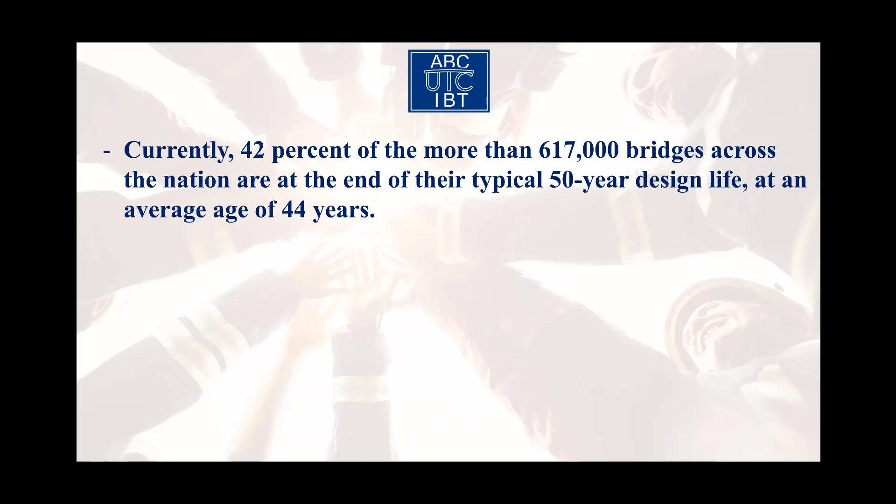It doesn't happen just by advertisement, by marketing, things like that. It doesn't happen that way. It happens by technology. So that's why this time our task is to bring all types of advanced technologies into bridge engineering in the US and communicate that with our stakeholders, with the bridge owners, state DOTs, municipalities, and so on.

That's why the type of research we're going to do is so interesting. We're going to be multidisciplinary. We are going to have our faculty who work with us closely tell you about their areas of research. And then at the end, I will come back and show you a couple of areas that I work on myself. But before doing that, I want to show you a video clip.

I want to show you this hopefully will tell you how influential we are with bridge owners across the US. To do that, if you allow me, I'm going to show you a very short videotape, a video recording from one of our conferences that happened in 2019, that really shows you our connections, how we connect with the industry, and what kind of influence we have.

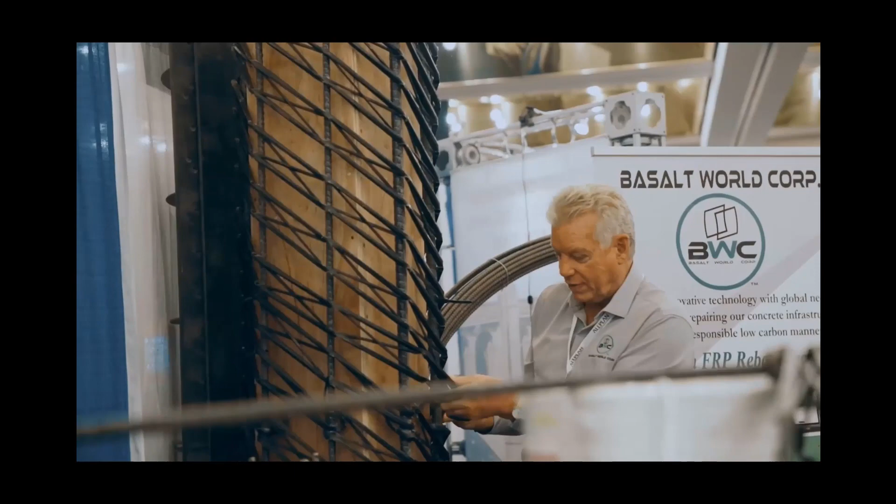We have exhibitors with the latest in innovations, materials, and technologies to support the ABC implementation effort. We have all the experts, those who are making things happen in ABC around the country here. You can talk with them on a one-to-one basis. It's a great opportunity for anyone in the bridge community to participate.

This year's conference is great. There's more attendees than before. It's been very good. We had a lot of traffic at our booth, so we're happy with that, and definitely met a lot of quality people.

This is a great conference. Not only are we talking about theoretical use of accelerated bridge, it's actually a lot of practical solutions. Whether you are integrated with your ABC and just how you do business, whether you're just starting out, whether you want to advance what you're doing, this conference offers opportunities in a variety of areas.

Great networking. The content of the presentations has been fantastic. And really, I've gotten a whole lot out of the exhibit hall as well, interacting with the exhibitors. So I definitely recommend attending the conference.

The award program provides an opportunity to showcase innovative projects and to recognize talented individuals that advance ABC. I think it's important to acknowledge what the industry is doing, and I think we need to continue to highlight people and projects just for the sake of ABC becoming common practice.

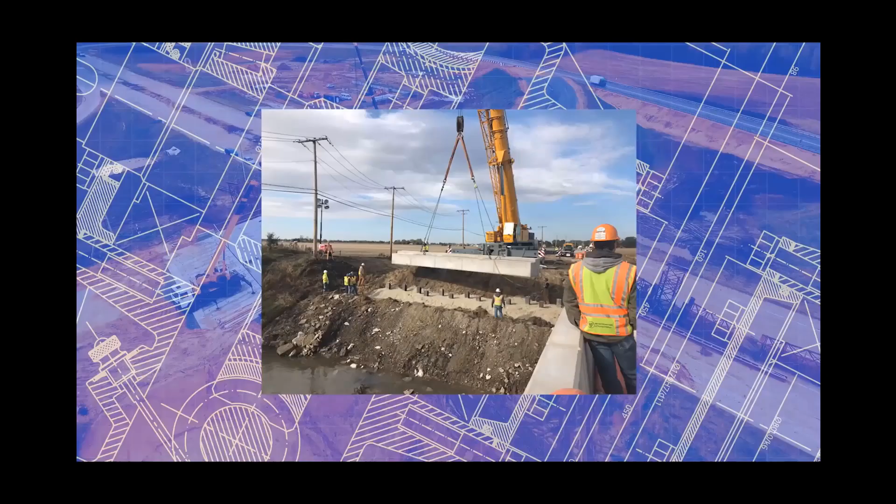We need to get it involved in every project. It's the right thing to do. It minimizes impacts to the public. It improves safety. It improves quality, and it makes me really proud to get this award because I know I was doing the right thing.

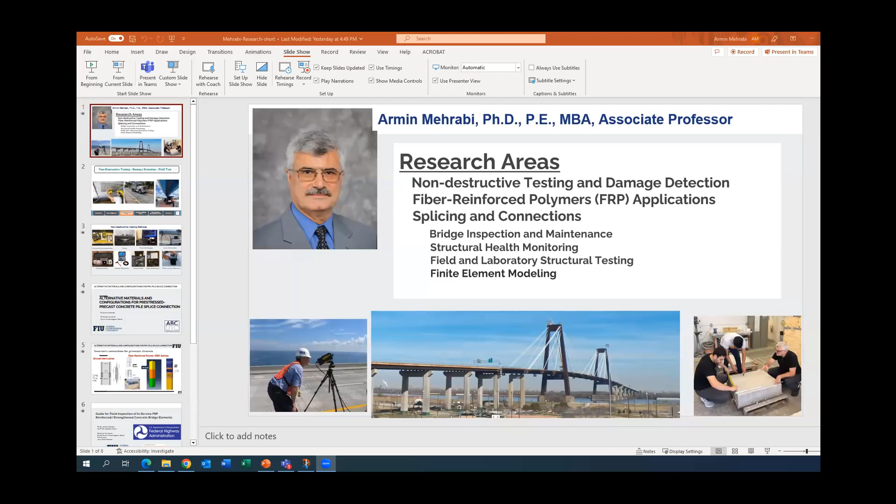Thank you very much, Dr. Azizinamini. So again, my name is Armin Mehrabi. I work at the UTC Center, and an extra point is that currently I'm also graduate program director. So for those of you who like to join our graduate program, I will be your first contact.

And I will help you through going to graduate program. And if you are interested in any of the fields and topics that you see today, so we'll make it happen that you get internship or other positions with the center.

So the areas that I work currently, and I have been working for the last 30-some years: non-destructive testing and damage detection, one major area. Then from the new, let's say, relatively new materials in construction and bridge construction, especially the fiber reinforced polymers, composite.

I currently have several projects in methods of splicing and connection in structures. And sub to that, the minor areas: bridge inspection and maintenance, basically structural health monitoring, field and laboratory structure testing, and advanced analytical models like finite element modeling, etc.

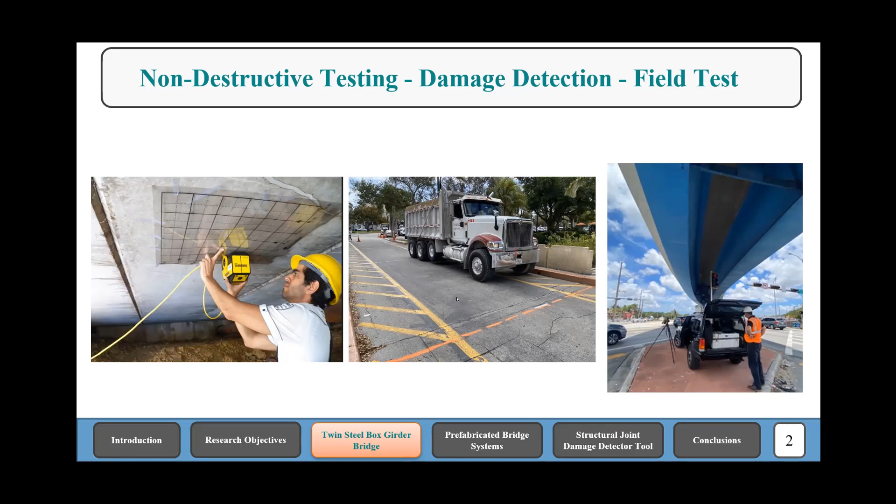Again, my team, which is part of ABC UTC or IBT ABC UTC, possesses - that's the important thing - most of the major non-destructive testing methods available and devices, including GPRs, drones, lasers, thermal imaging, etc.

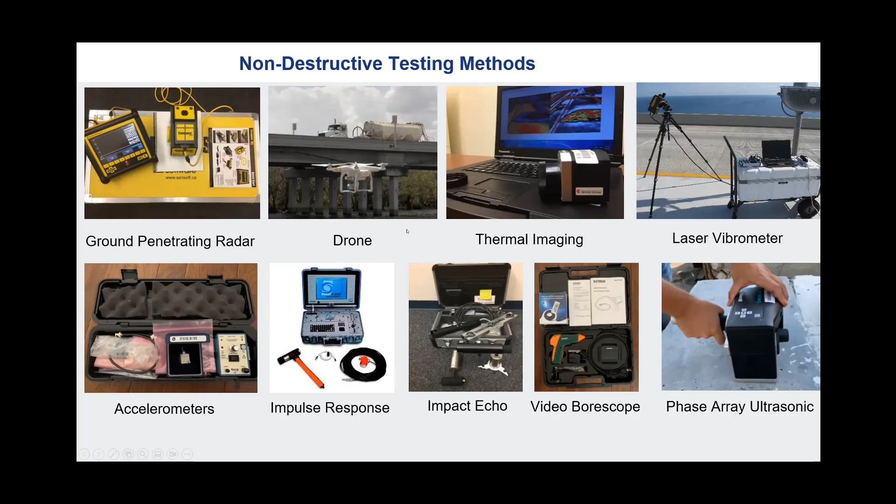Just a couple of projects I've worked on as examples of what we've been doing. One is very dear to me and my team - a project we did for the ABC UTC, looking for alternative materials and configurations for pre-stressed precast concrete pile splicing connections. Basically, to connect and splice the piles that come to the field for driving into the soil. This project gave us a lot of products, including methods and means applicable not only to piles but to all structural prismatic elements as well. This is a sample of how ABC UTC can help any topic reach its maximum potential.

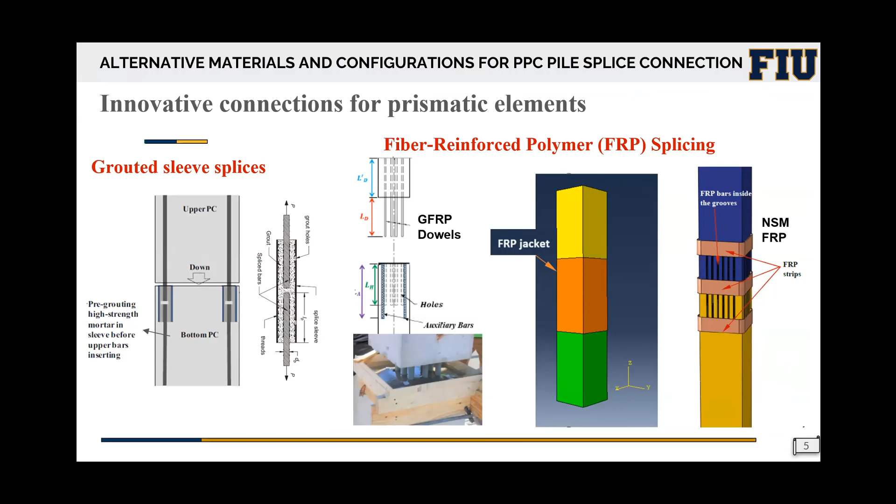As part of that project, we proposed three different new connection methods: grouted sleeve splice for prismatic elements, and splices using fiber reinforced polymers, FRP. We received three patents on this product. During the life of the project - a year and a half, two years - we received three patents.

Another project I'm doing for the Federal Highway Administration is developing a guide for field inspection of in-service FRP, fiber reinforced polymer, reinforced and strengthened concrete bridge elements. Interestingly, despite so much work done on inspection and NDT testing, there is no guide for field inspection of concrete elements that use FRP. So our team took on developing this guide.

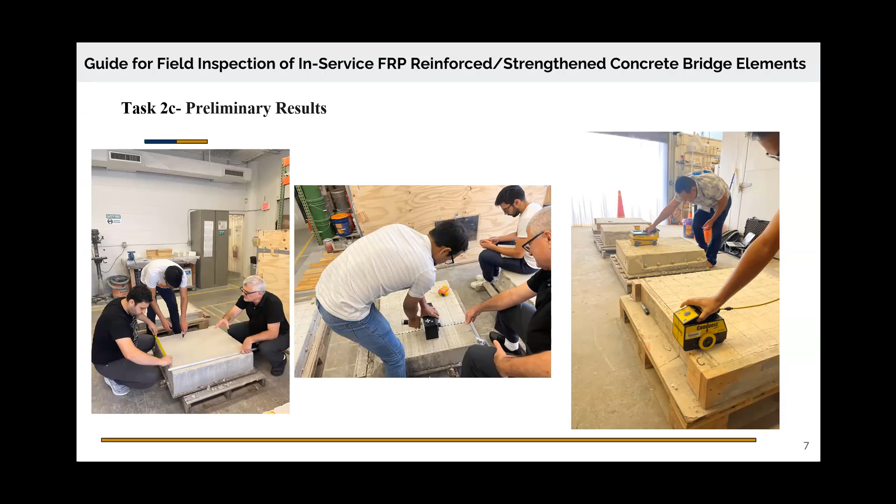That project, in addition to analytical work and review of other work, also involved constructing several specimens, as you can see. I want to include this picture because our work includes lab testing, field testing, analytical work, etc., to give you a picture of what's really going on in these projects. These pictures represent the top of the work.

On the left side, you see glass fiber reinforced polymer that was placed in the concrete, then the concrete was cast on it and embedded. Below, you can see GPR detecting the glass fiber reinforced polymer inside the concrete. The significance is that not only have we detected steel in concrete before, but this is the first time detecting plastic, non-metallic elements. On the right side, you see external application of FRP - on top, application of carbon fiber sheet for strengthening, and below that, a thermal image of that surface showing exactly where the damages are.

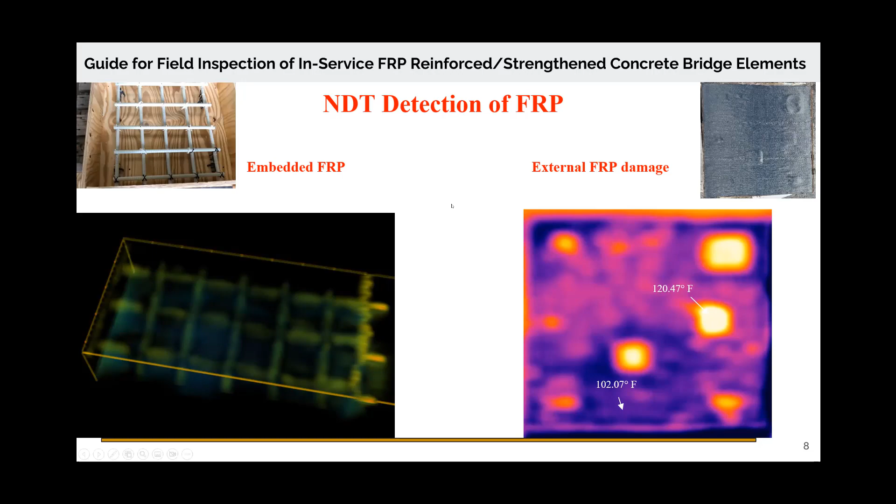These are just a few examples to give you an idea of what's going on with our center, specifically in my group. As Dr. Azizinamini mentioned, anybody interested in any of these topics or others, please get in touch with me and other faculty. We will be more than happy to help you through the decision making.

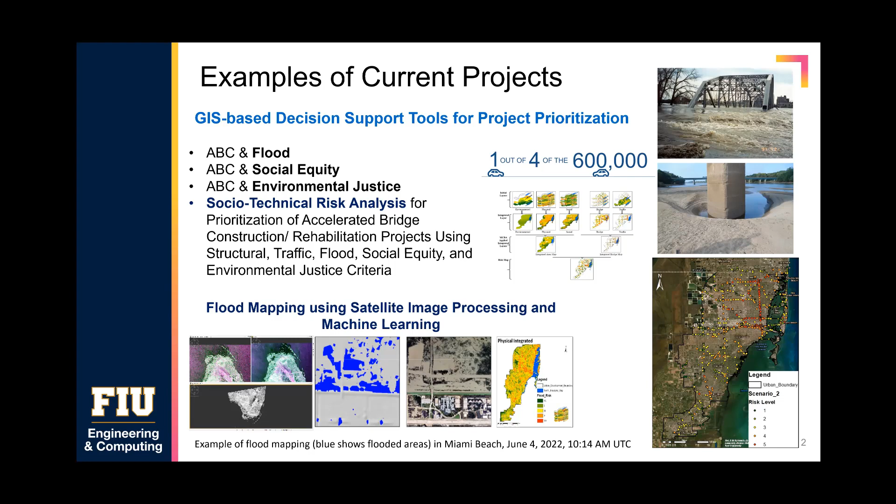So we are currently doing another project, which is about new construction projects. There are a lot of common concepts between the projects, but for the new one, we are looking at how we can incorporate safety, social factors, and environmental justice in determining what project is really a good candidate for ABC. So I have another slide for you.

So these two projects were kind of the projects that we have been working on, and this is just to give you some ideas for the future. For the new center, for the extension of the ABC UTC, which is the Innovative Bridge Technologies, we are really looking out of the box at related technologies that can affect and work with bridge technologies.

And just to give you a couple examples, one idea is to have climate resilient bridges. You have heard about climate change effects in different parts of the country, and basically each part of our country is being affected by different aspects of climate change - it could be extreme floods, sea level rise, excessive heat, wildfire, mostly in the West. And these are disproportionately affecting people.

So social equity and environmental justice are also involved. The problem here is how to understand the linkages in our bridge system and these different effects of climate change, and how we can address these issues in our projects. So this is basically a multi-scale problem. First of all, we need to understand the linkages between these problems. This is like a system of systems problem, because each of these factors is actually a complex system itself.

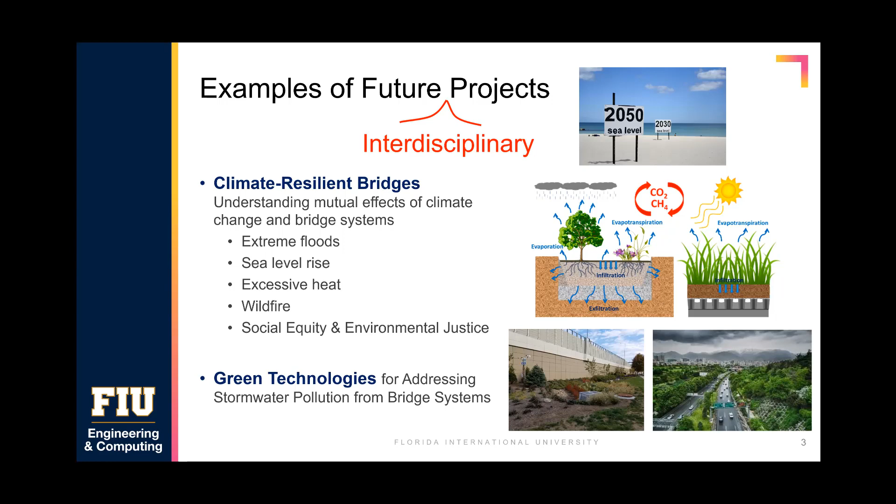We do a lot of field monitoring, sensor-based field monitoring to look at the performance of green infrastructure systems. But these green infrastructure systems can be integrated to bridge projects to address, for example, the stormwater pollution that we get from these systems and to address the urban heat island that is being increased because of adding our bridges. So we can integrate these green technologies to our bridge project to address the climate change issues.

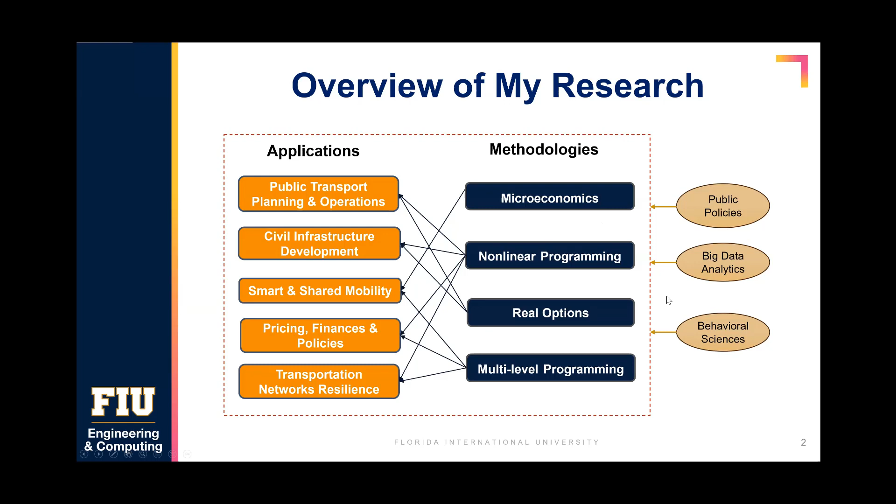My research expertise is mathematical modeling and system optimization, especially mathematical programming. Since I have quite broad research interest in the planning, operation, and management of multimodal transportation systems, I developed quite a few applications in several core areas of transportation, namely public transportation, civil infrastructure and development, smart and shared mobility, and transportation network resilience. As you know, transportation research is highly interdisciplinary. I also borrowed theory from big data analytics, microeconomics and behavioral science.

A few examples are briefly explained here. I have studied how transit lines should be extended over time. I study how to regulate and subsidize a transit operator from the government perspective. I also develop a travel incentive scheme to encourage travelers to use public transport and nudge dynamic carpooling participants to revise their predetermined travel schedule. Those studies have yielded more than 10 research papers published in leading transportation journals, Transportation Research Part A, Part B, and Part C.

I'm very fascinated with many other transportation research topics. This is the reason I plan to work on several topics. If you are interested in it, we can work together on this. For example, this is one research proposal I proposed to the Florida Department of Transportation. Right now it is recommended by the Traffic and Transportation Engineering Office headquarters.

On this research project, we propose to use the hydrodynamic model to generate near real-time 2D flooding inundation maps. With the identification of the flooded roads, we will be able to analyze the impacts of those unpassable roads on the traffic condition. We will further cultivate the GIS layer to show the flooding factor along with the traffic condition. These indicators will be further incorporated into the Florida Department of Transportation e-traffic website.

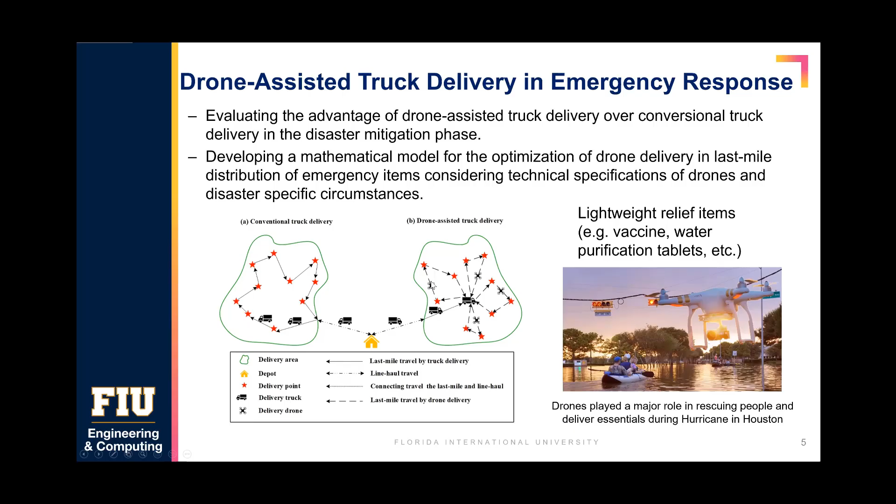So if you are interested in the above research or any of my previously published research papers, I would love to work with you.

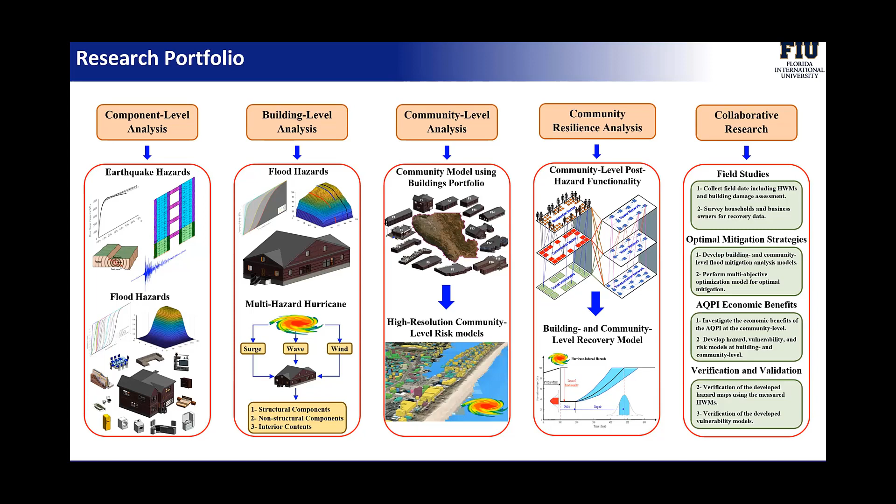Hello, my name is Kingsley Lau. I'm an associate professor in the Department of Civil and Environmental Engineering. Our research delves into the materials durability and corrosion durability of our infrastructure.

Corrosion of our infrastructure is actually a very expensive problem. The GDP, gross domestic product, represents how wealthy a country is. In most Western and developed countries, the cost of corrosion is about 3% of the GDP, so it ends up being a very expensive problem.

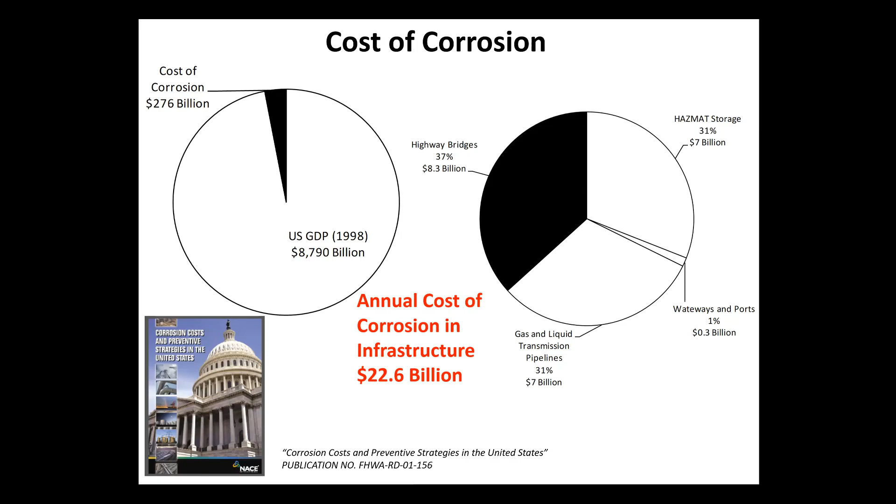A large part of the corrosion problem occurs with our highway bridges. The estimated direct cost of corrosion for highway bridges is about $8.3 billion a year. It's money that can be well spent elsewhere, especially for social services, if many of the causes can be prevented.

We use many different construction materials in our infrastructure, primarily steel and concrete. One building technology is reinforced concrete. Concrete is very good, especially for compressive forces, but not very strong with tensile forces, so typically we put reinforcing steel to carry some of those tensile loads.

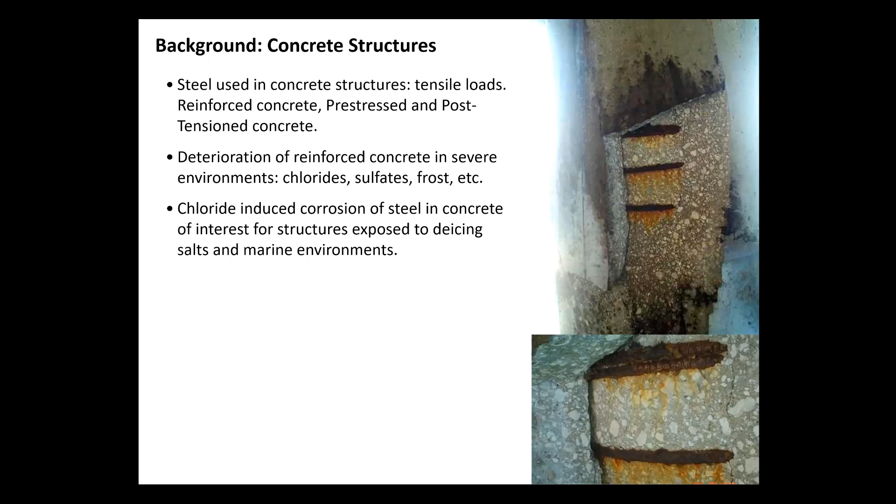I have some more pictures showing the extreme damage caused to some of our substructures due to corrosion. Here are some pre-stressed piles. You can see the pre-stressing strands and how they're completely broken through.

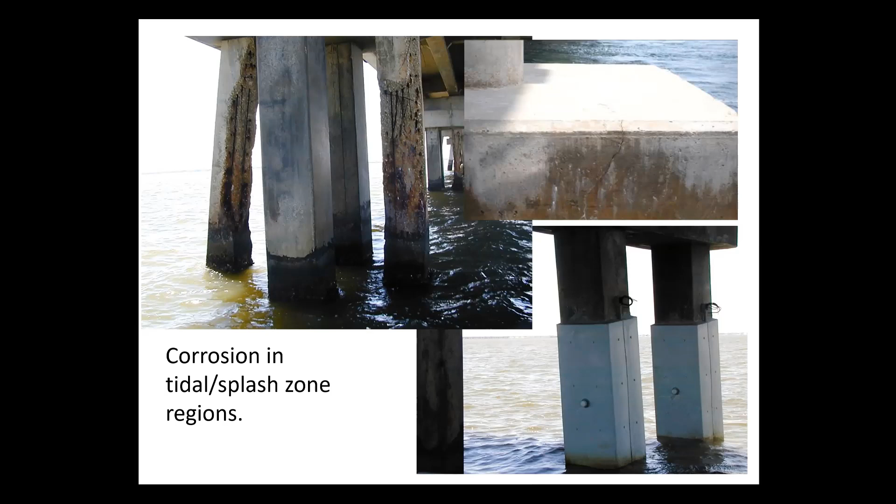So we continue to look for new technologies and different ways to better protect and reinforce our structures. Other systems include post-tensioning systems. In some of our bridges, we use high-strength cables to hold structural elements together. In these pictures, you see how corrosion can come in even in these protected areas within box girders.

There can be major corrosion damage, severe corrosion happening in less than 8 years, for example. Very dangerous and causes a lot of problems. You can imagine these tendons are about 4 inches in diameter.

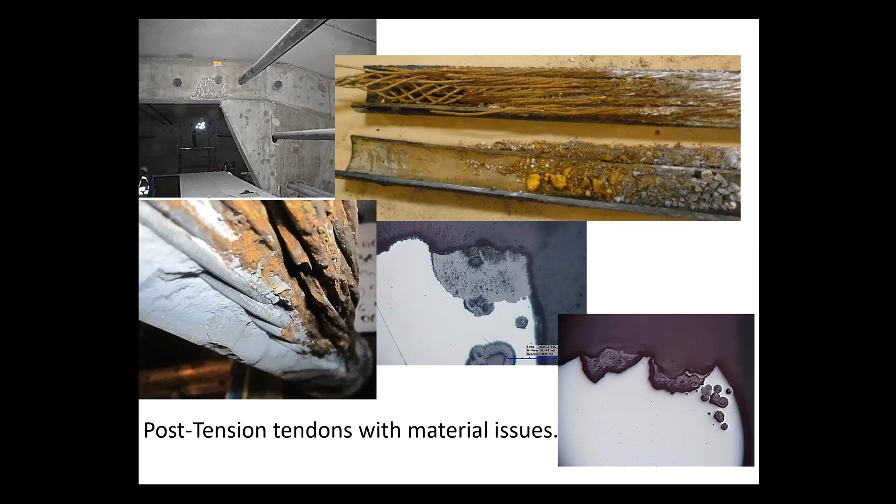They're filled with 22 7-wire strands filled with grout material, like a cementitious material. Very rigid structure, but the force of the corrosion loss was so severe that these elements ended up becoming like curlicue fries. So much stress was released that it completely distorted these very rigid structures. It's a very dangerous issue.

Not only our superstructures, but some of our structures buried in the ground have materials issues that can cause corrosion. I have some pictures here of a tunnel lining with some cracks. The cracks allow salt water to seep in. You can see the moisture penetrating through, with some of these materials coming out. You see it seeping—it's called efflorescence, the development of cementitious materials that react with water and come outside.

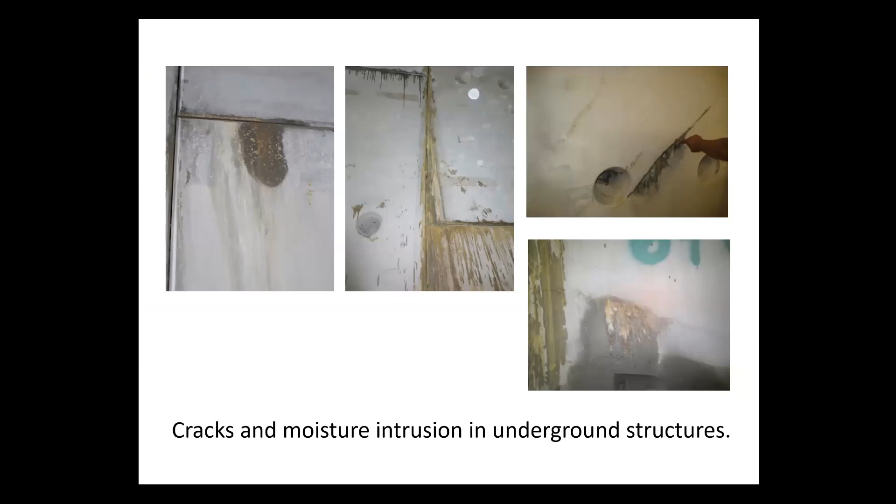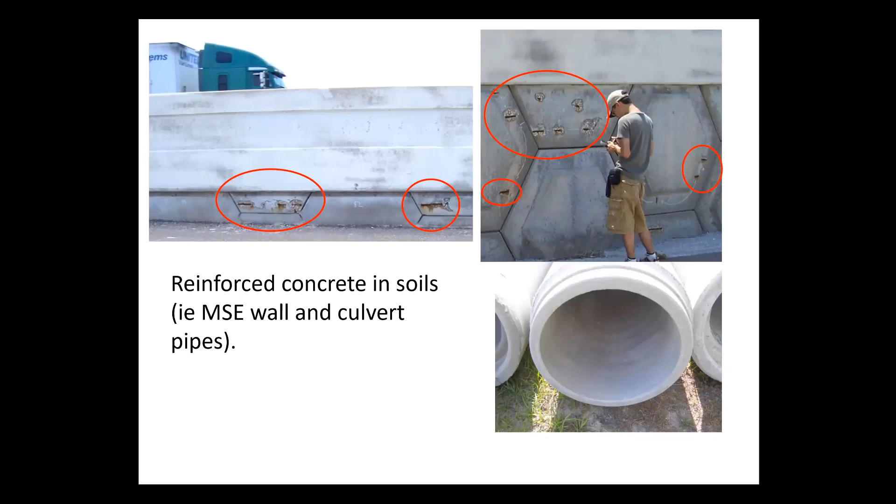It can be a possible future corrosion problem. Some of our MSE walls, mechanically stabilized earth walls, sometimes have problems. The steel parts you see here are part to reinforce that wall to keep it from falling over. You lose those steel components due to corrosion, you lose structural integrity.

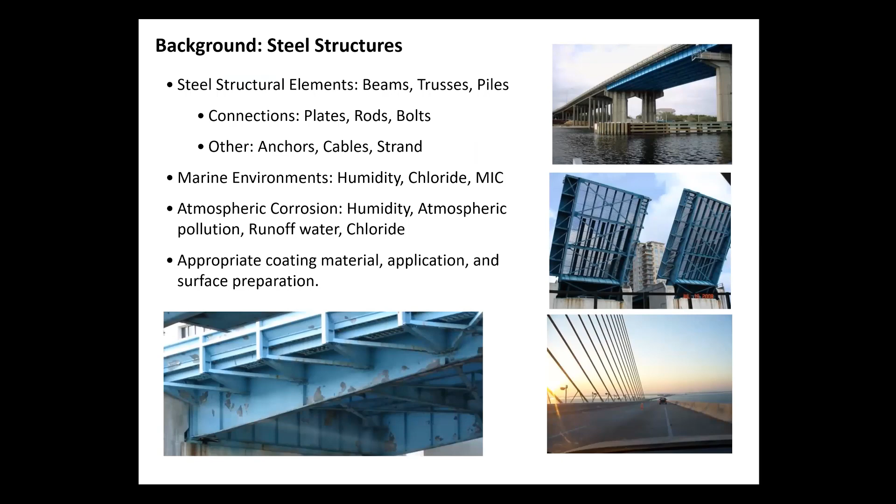Other materials include steel components. We do have steel bridges in Florida. You can see how paints and protective coatings are mainly used to prevent corrosion, but they continue to deteriorate. Indeed, in the state of Florida, we have every year a large number of paint jobs that need to be redone.

And the cost typically is about $26 million annually just for repainting our bridges to try to prevent some of these corrosion issues. So in our work, we try to understand a corrosion problem and give recommendations on how to prevent corrosion and solutions to fix the problem, an area we try to look at even with the ABC program. So I thank you for your time.

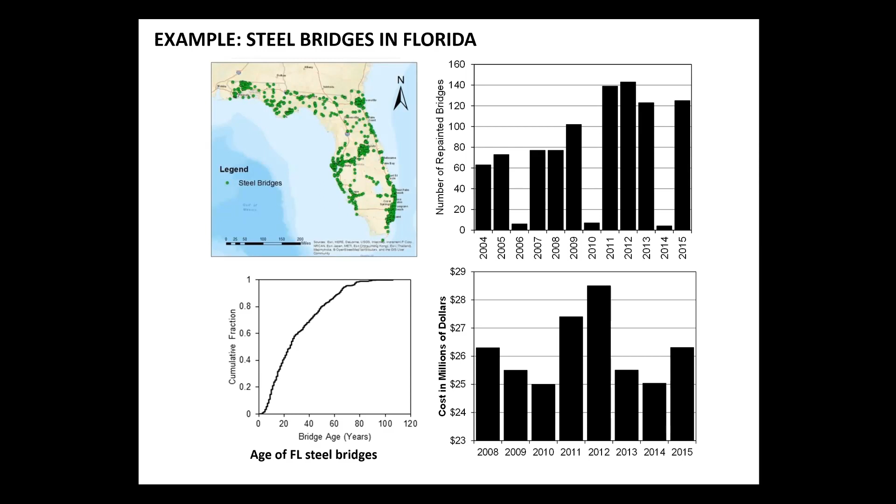All right, great. So let me just very briefly show you some of the work that I will be doing myself, and then we'll open it to questions that anyone might have. Okay, so I am pretty much, I don't know, good or bad, if my name is somehow associated, if you mention my name at the national or international level, they're going to say expert in steel bridges.

But nowadays, actually, I do probably 90% of my work in the ultra high performance concrete area, developing solutions based on ultra high performance concrete, or UHPC.

One of the projects I will be working on with many faculties, actually, this is not just one person, is not going to be able to do this. This is working with many faculties, not only at FIU but also at different partner universities, is going to be the next generation of the asset management system.

In the US, we have a system where basically every two years, every state has to inspect their bridges and then send the data to the Federal Highway Administration. A National Bridge Inventory database is used to kind of monitor, and that is actually used for how the states get the money. So it's time to develop the next generation, and this is one of the ways we are going to try to make the bridge industry in the US absolutely number one.